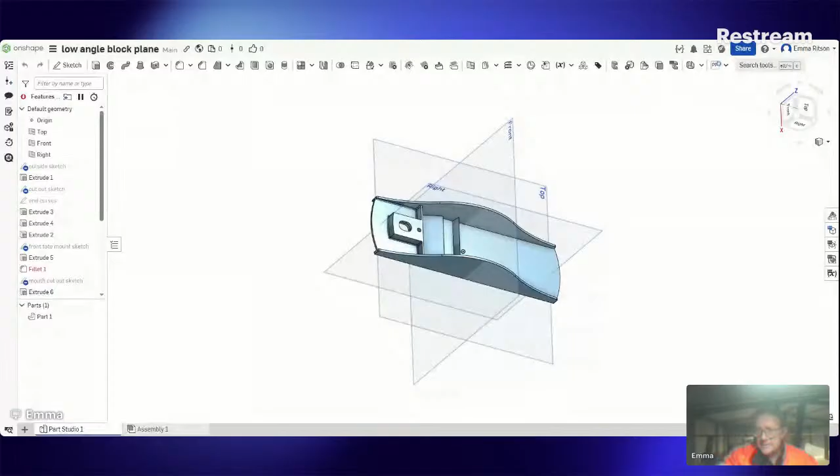Wonder what the weather's like in Brisbane. It's supposed to rain all week here until Friday. If it rains like this until Friday, we're going to have problems, and I'm probably not going to be working Friday, to be honest. But we'll see how we go with that. If we get 5-10 mil a day, it's going to be quite pleasant by Friday. So we'll see how we go. But we've had more than that today, and it's sort of been like this most of the day. It's just bucketing out there. Anyway, more than I expected. We're expecting a little bit of rain this week. It's cooled things down, but it's probably not our ultimate outcome if it keeps going. As soon as we get everything or nothing.

And the trouble with Glen Ray is that give it two or three days of this and the roads tend to disappear underwater. The yard here's gravel and not too boggy, so we're doing all right there, I can get in and out. Got to find somewhere flat and a little bit elevated to actually park the van to sleep. That's the thing, because if it's not flat, I end up with cramp all down one side by about 3 o'clock. Anyway, too much information.

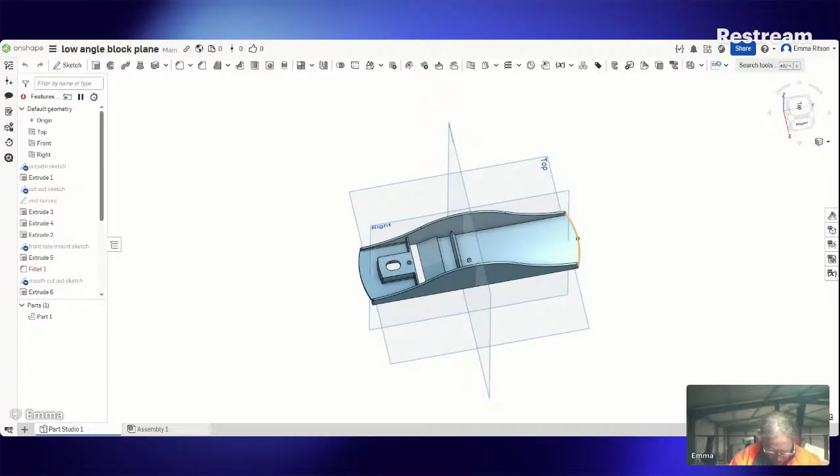I reckon that comes back from the back edge of that frog there, about 19 millimeters, and we've already got that piece in there, which is sort of a feature of it.

The easiest way to do that is just to make a plane from this surface. We use this button up here, which is the plane button. If you hover over it, it tells you what it does.

It says it gives you a plane from existing geometry. If we click that, it says plane, and the entities are here. So it puts a plane on that angle, which gives us something to work on.

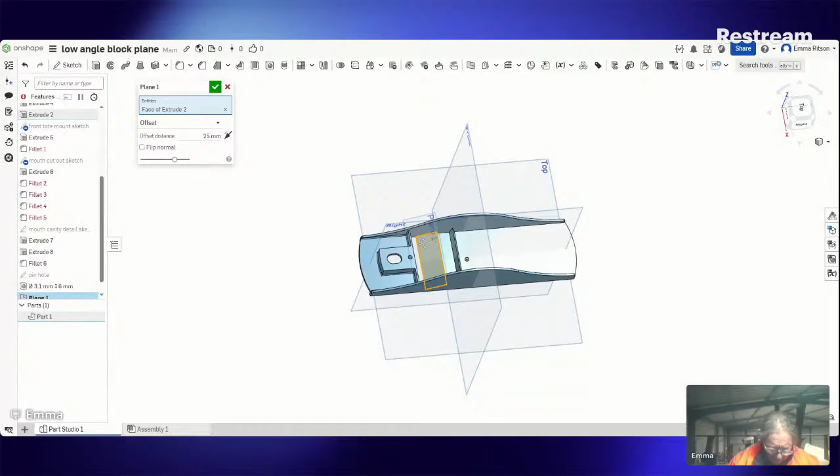Now there's a couple of things off that, so we're going to leave it and just change our pieces. I think we're going to leave that plane right on that level, so we're not going to offset it. This is trying to offset it.

There's all sorts of features we can do here with planes, but we're going to stick to offset, and we're going to go 0 millimeters. Probably simple as that, click 0. That gives us a plane the same as this one and this one, right there on that, 21 degrees for the low angle.

So if we want to put something on here off there, we can make a sketch directly on the plane. Sketch plane is plane 1. And if we press N, that brings it round sort of normal, so that this plane here is actually level and flat.

We use the use button and the construction line button. Then we can use this line here as part of our sketch. And that'll be a construction line across there as we've put on this sketch.

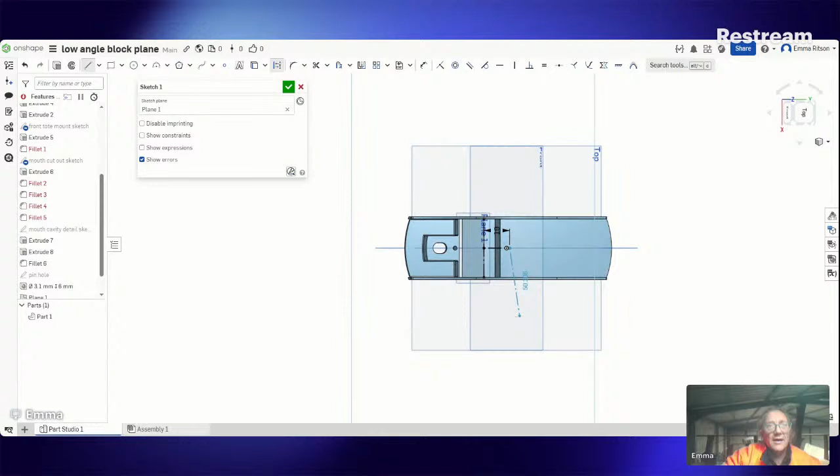Not terrible, that's about where we are. We'll zoom that in a bit so you can see. But that's where that is. It's way past where this is. This is not anywhere near far enough back.

This boss in here is probably about 12 millimeters diameter. So if we draw a circle on here on that plane, that should give us a circle on that plane. We'll go 12 mil, and we'll extrude that.

And of course it's extruded it up that way, and we want it to go the other way, so we'll change this direction. What you'll find now is the chopstick sticks out the bottom like that. That's not particularly helpful, put a bit of a taper on it.

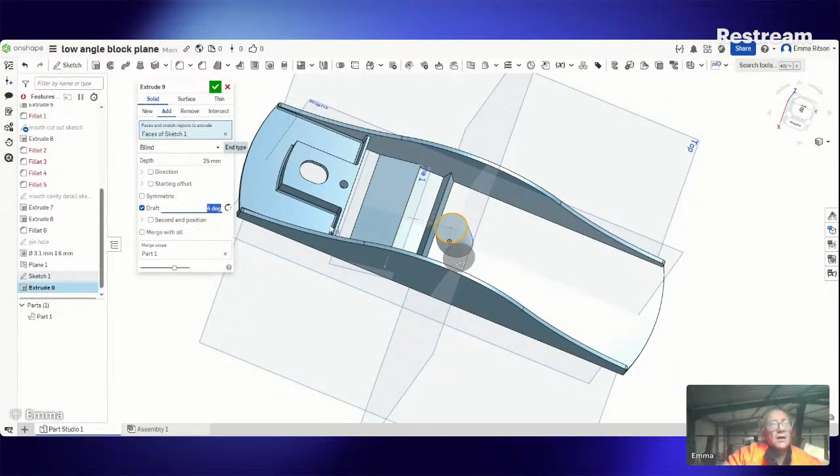So we'll go draft. There we go, I reckon it's 3 degrees isn't far out. Go 4. There, like that. Now it still sticks out the bottom here.

It's not helpful, but we can do two things. We can go past and make another sketch on the side and draw a box and chop it off, which is a bit ugly and cumbersome. What we can do here is click this up to face, and click on here, and we can select this face.

Okay, that's that boss in place nicely. So that's the way to do that.

This feature here needs to come back up a bit, I think. Probably 6 mil, something like that.

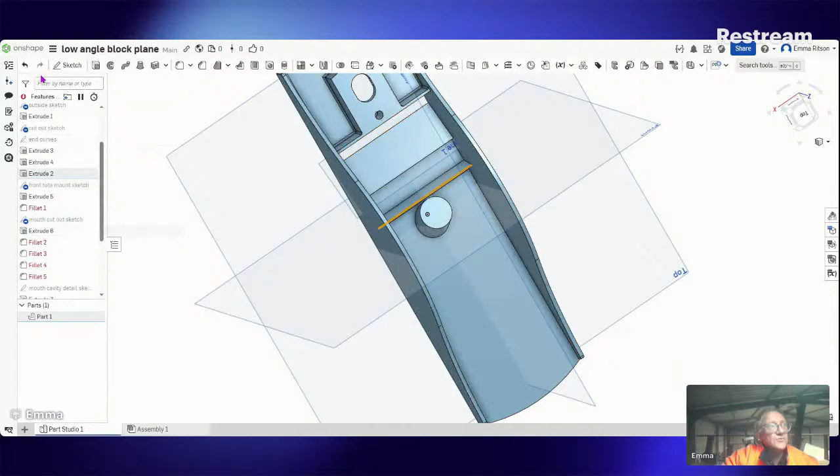So we've got to find this feature. If we click on that, it highlights the actual feature here in the feature list that we've actually used to make that, and it's an extrusion. So it's probably on the cutout sketch, I think.

We edit the sketch and click it normal. It turns it upside down, but there we go.

And this distance is not enough, I don't think. So we're going to change this.

Now put a line up here. Well, we're probably going to extend that line, I think might be the best way to do that. Is just extend that, and we can make that a construction line, and we can extend this one up here as far as we'd like.

Does that work? I think it did that time. All right.

So this distance here from here to here, if we measure it, just measurement here, on that plane is about, let's say 12 millimeters roughly. 12, let's go 18. If we change that though, it's going to give us all sorts of problems.

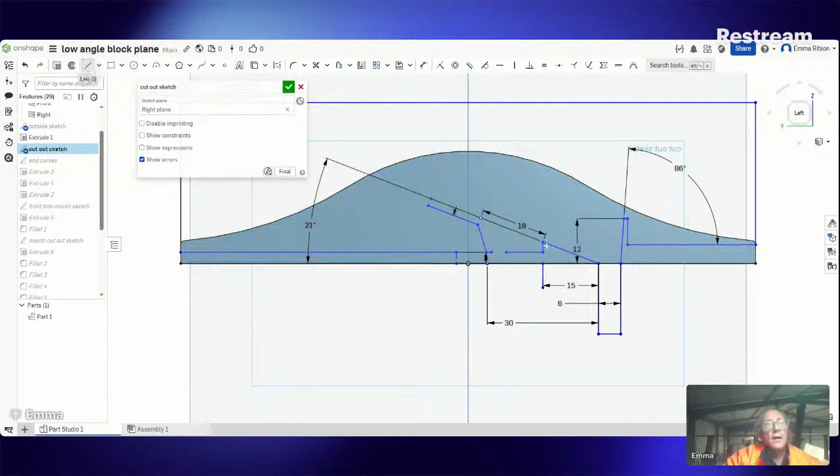We could put something up here. If we zoom that in, it's just a mouse scroll. Something like that. Click left, that back into frame.

And we're going to trim some piece out of here. So we'll trim that one out, and we'll trim that one out. And we'll extend the other one. We'll extend this one through to here. And that turns the background grey.

That means that we can extrude that. And if we click that - don't see anything's happened there. But look at that, somewhere pretty close.

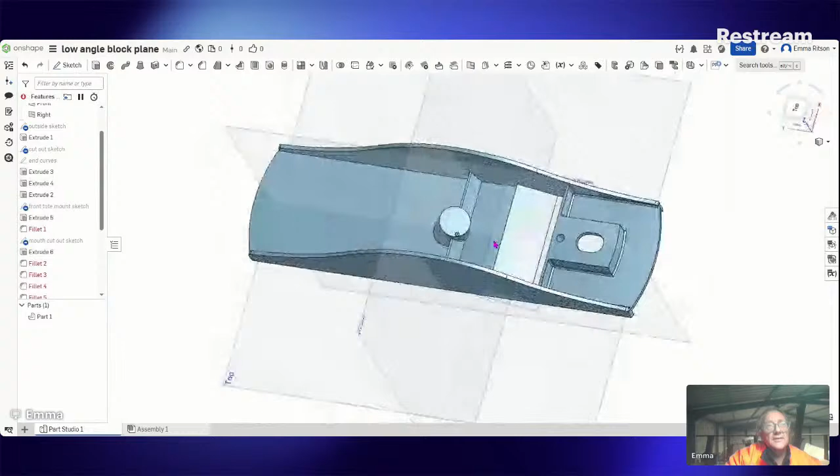So we've got that feature. We can go through this now and put fillets all around. What did we have the fillet set for before? It was 3 millimeters - that seems a bit extreme. Let's go with 1.

I'll fillet this on the side there. I don't think we can do that - no, it's not going to let us do that. So we'll just do one side. Hit the green button or hit the enter key. And the same on this side.

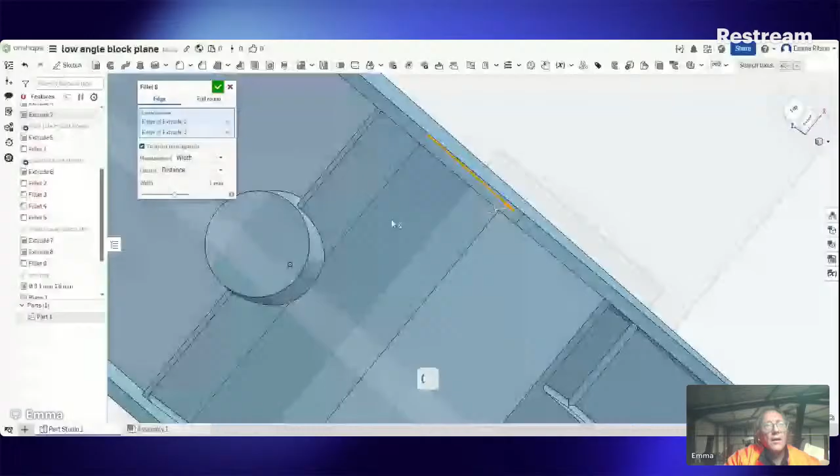Now this already has it set the same as we're using. We'll set this one. So let's put some fillets in there like that. Nice. And we want to do the front and the back, so we'll do that. This one is there, and then this piece, and this piece.

Confirm that, and we'll do the front. It's that line there. So that's all that in there, pretty good.

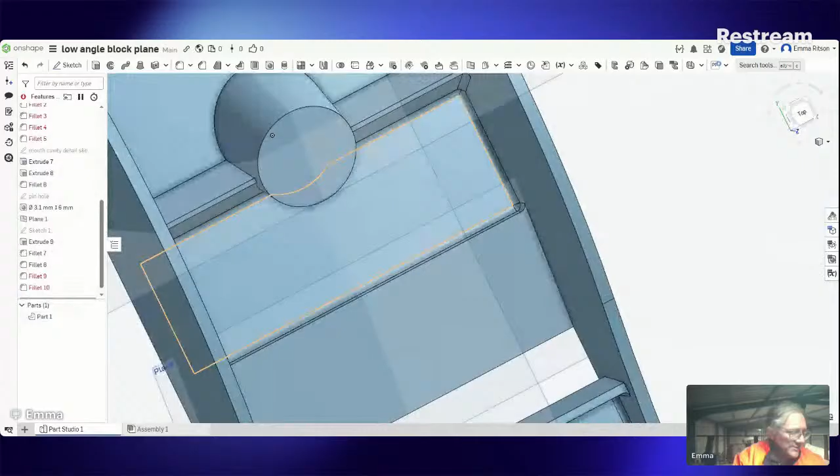We're getting a clicking noise. Can you hear that? Is that annoying everyone? Why are we getting that? Unplug this. It's annoying me. It's just started happening - I'm not sure why that is.

Hole in here, it's a M7 thread, I would say. I'm going to call it 7 millimeters because we'll go metric. We'll just put another sketch for that, and then we can change it if we need to, quite simply. We will rename that for...

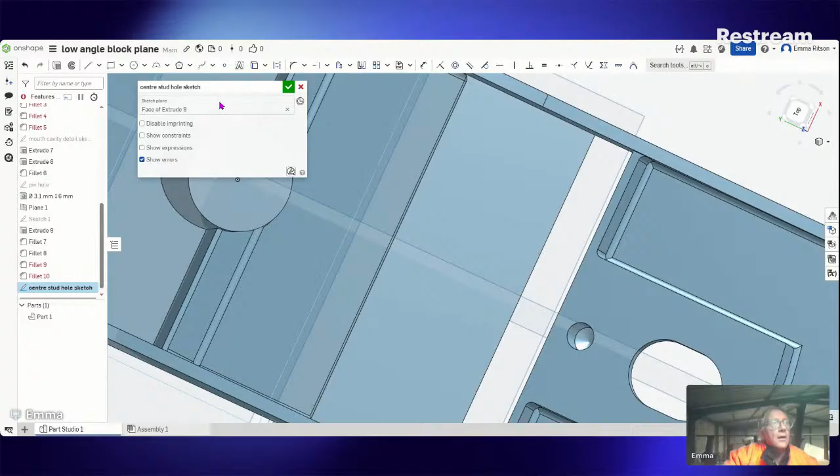So we can find it. On this face, I think we were going to put it. It's even easier if we forget where we put it, we can just click on there. There we go - face of extrude 8 and a 7mm hole.

7. That looks about right.

How far does that thread go down? Just far enough that it doesn't come through the bottom, I think. It's quite deep, probably 10mm deep. We'll change this anyway to 10mm.

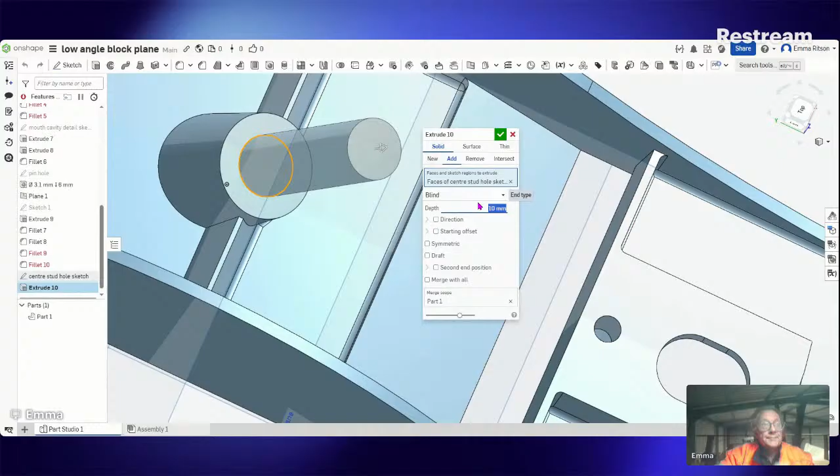And because this is an extrusion, it's pushing it out the front. If we click remove instead, it pulls it in there like that. Doesn't come right through. If we look on the side, that's about the space we've got. If we have a look here.

And hit enter again - we've got that hole. Now we can put a thread in there. There's a couple of ways we could do that. We use the hole function, and that sort of gives you a thread - it gives you an impression of it. It's a little bit ugly.

If we have a look up here, there's a feature script called Thread Creator. I don't think it's part of it - I think you've got to search for it. But with Thread Creator, we'll put a thread in that face. ISO standard, if you like.

M7 pitch is 1mm. What's the standard M7 pitch? Let's have a look here.

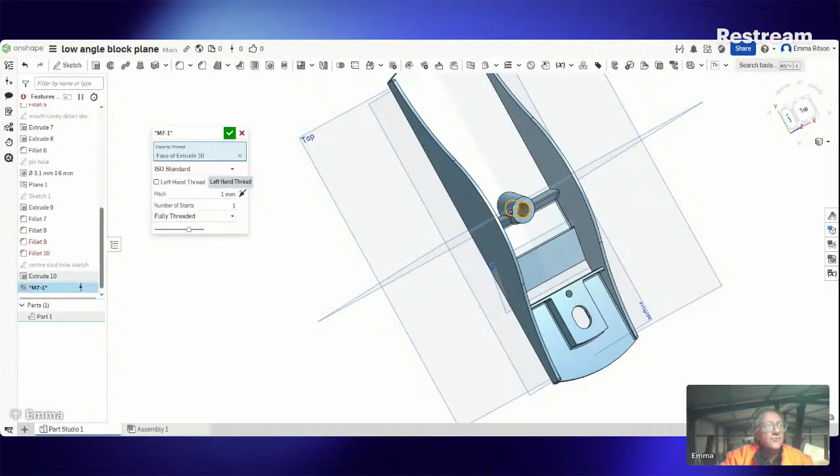So 1mm pitch, one start, and we want it fully threaded. We don't want a left-hand thread, we want it the ISO standard. If we click that, it's put quite a decent thread in there that we can actually add that sort of stuff.

So there we go, fillet around it, and we're just going to do it again. Like so, looks good.

And this here wants a fillet as well. I don't know if we're going to manage to do that, but I think a fillet on here. Yep, it's going to do that. Let's manage that as well.

We could probably fillet this while we're on the job. That looks pretty good, and we could put a fillet here.

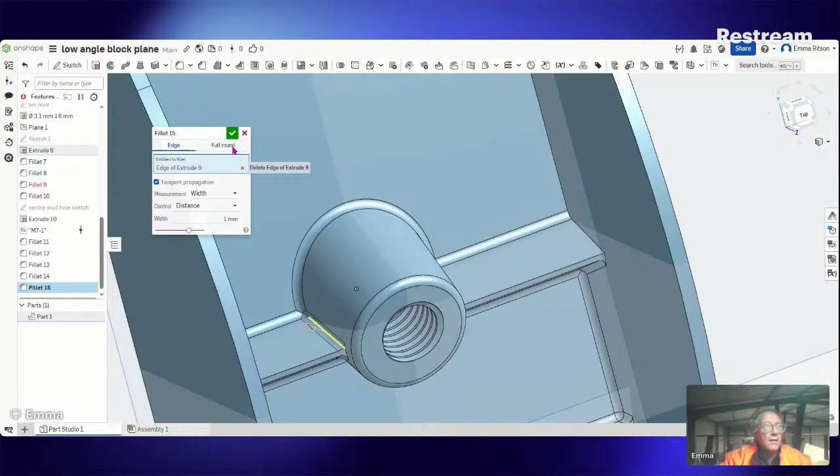Come on. This hasn't finalised as well as it should, that's a bit ugly. I'm going to try again.

No, it's not going to like that. It's done a beautiful job there. On this side, it's struggling.

It's details, but I'm not sure why it's done that. Anyway, we're going to live with that for a bit. It's done the side, it's given me a different fillet. Don't know why that is. Anyway, so that's that feature done.

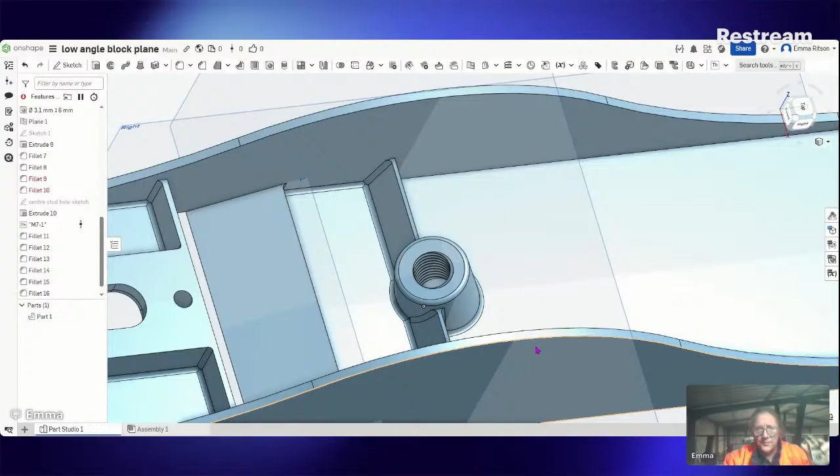Let's move on, there's two little cutouts, so we'll have a look at this again. So we've got this feature all finished here from last week, and we've got this feature here finished. I'm doing this in mirror, so right.

As a way of a change, we could put these thumb dents in here. They're about 17 mil by... oh my gosh, use my broken vernier, or actually fix it. Probably 37 by, well, it's bigger than you think. Probably 18 by 37. And might be only a millimetre deep. Let's have a look at that.

They go in the side here. Might put them in first or next. This line here is our plane. Now that's still showing - if we click P, all the planes. Press it again, they all come back on.

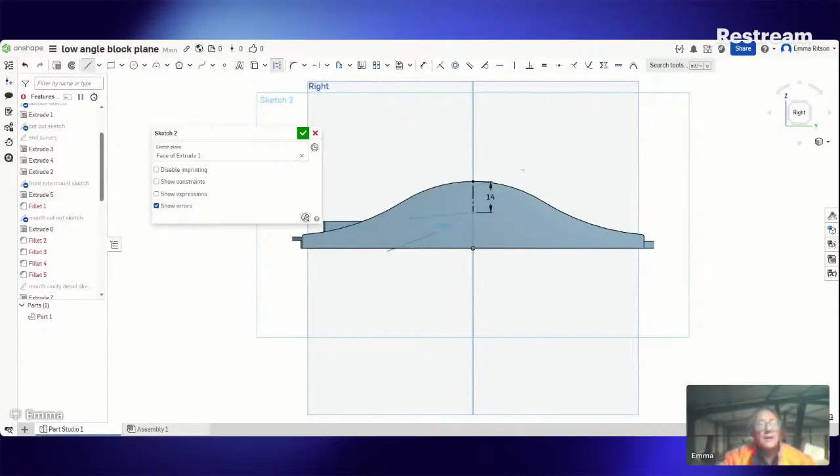Now if we click ellipse here on this menu - 37 that way, and 18 that way, something like that. So that's sort of how it should look.

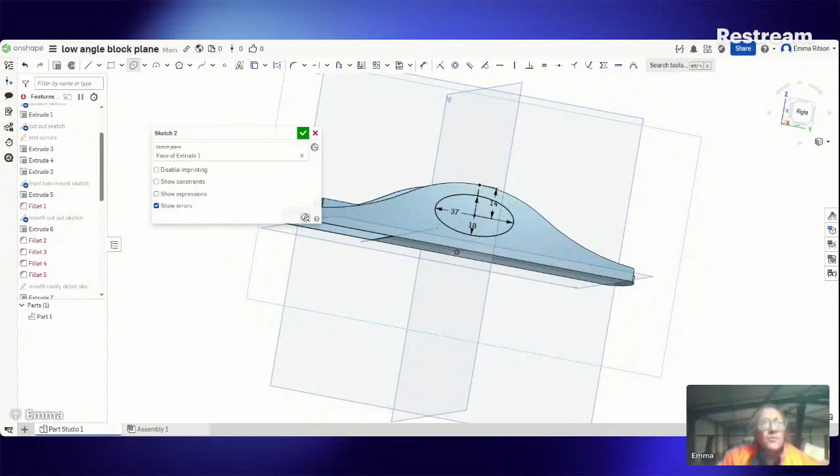But it doesn't fix your problem because it's not going to give us a concave face. If we extrude that, it's only going to give us basically a cutout with a square edge around here. It's going to look a bit ugly. So what we need is to actually make a ball, a squash ball here just off the side.

And we decided it wants to be about 1 millimetre deep. Holding a ruler over that or something, it's probably 1.2 deep.

And it needs to fill out to that line. If we go to the front here, and we hide part 1 by closing this little eye, we can see this sketch.

Make another sketch. Sketch plane, which should be the centre line for the ellipse. And a construction line here.

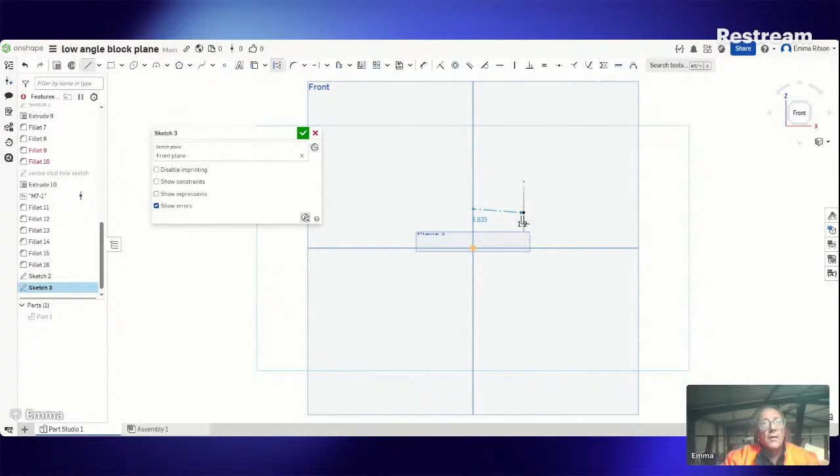I'm going to go this way, 1.2. And we need to find out here - if we go construction line from here, out here somewhere. Probably the best way to do that is use the use button or the project button.

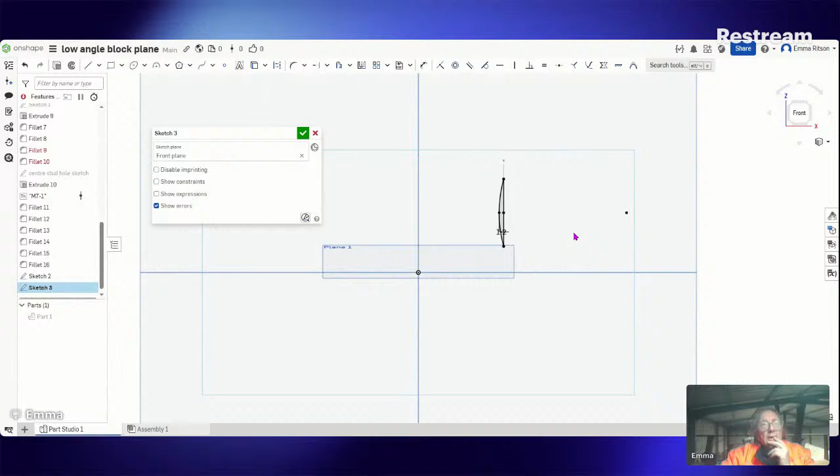And we put that line onto our new sketch. And we use this feature here called a 3-point arc. And our 34.35 millimetres. So there's our workout on that. We can put a measurement on that sketch.

What we're saying is if we draw a circle - this is a little bit challenging actually when you think about it. But if we draw here at 34.35 millimetres or 68.7. Hey, Peter. Right, that's sort of where we need to be.

It is a lot of stuffing in that. If we do the front here, we'll go to the top and make another sketch on the top plane, or make a sketch on that plane and face of sketch 2. And do the same thing, I think.

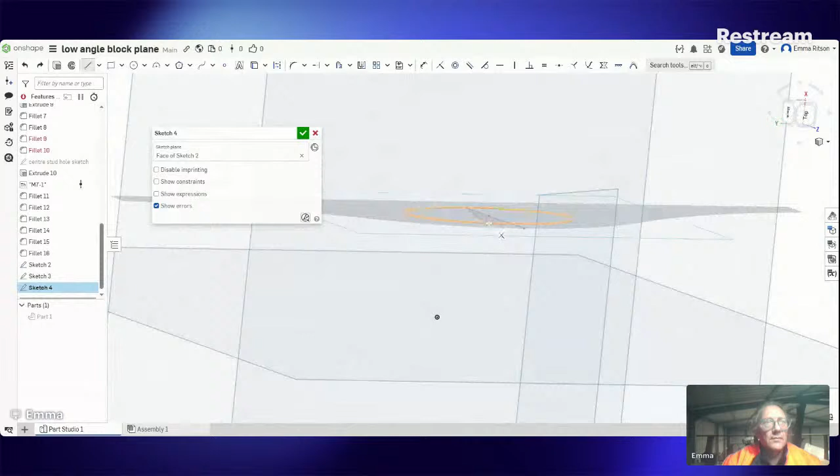Zoom it in so we actually line up. It's not going to line up, so we'll press escape out of that. Get rid of that, and what we're going to do is on this sketch plane, we'll draw a line. We'll click the use button, and we'll use that line there on our sketch plane. That way, when we do this, it wouldn't do it.

I see why too. All right, let's close that sketch 4. And it's got rid of that because there's no actual detail. What we need is a sketch on this plane here. So if we make a new plane, there we go. This is getting a bit complicated.

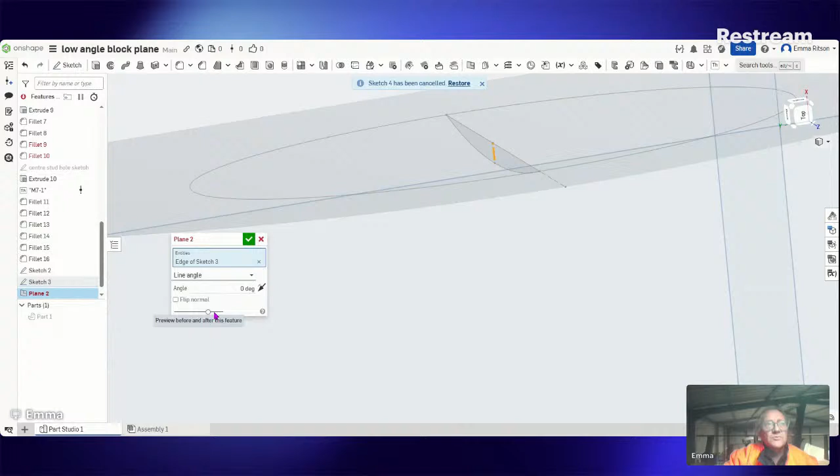Make a plane off that line. And it says offsets, not what we want, line angle is what we need. We'll make it 90 degrees to that line. Should swing around, and that gives us a plane there to put a sketch on. So that's what we need.

Sketch plane is plane 2. And then flip normal. Then we can use this line here in our plane, in our sketch, and this line here in our sketch, and the 3-point arc again. And that's 143.

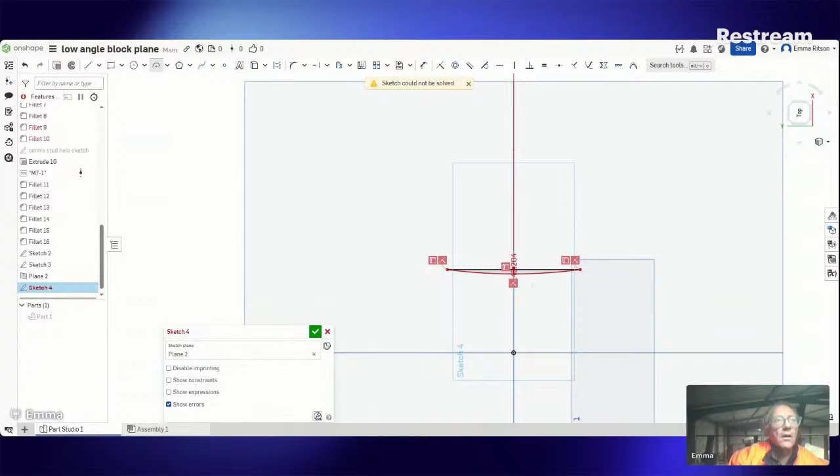So what we've got is the actual dish there both ways.

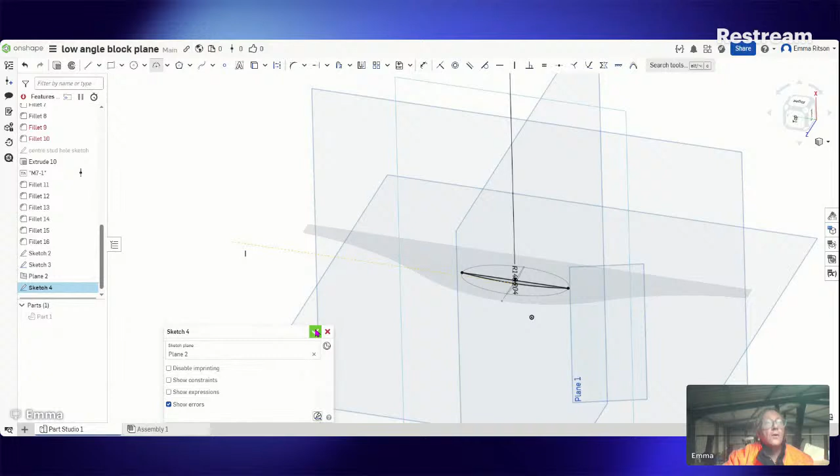So how do we convert that into an actual surface? Interesting. We've got this curve here and this curve here. We want to convert them into an actual surface. Now let's have a look at this. There is a way, I've just got to think about that.

Now, I think it's fill. Our edges are there.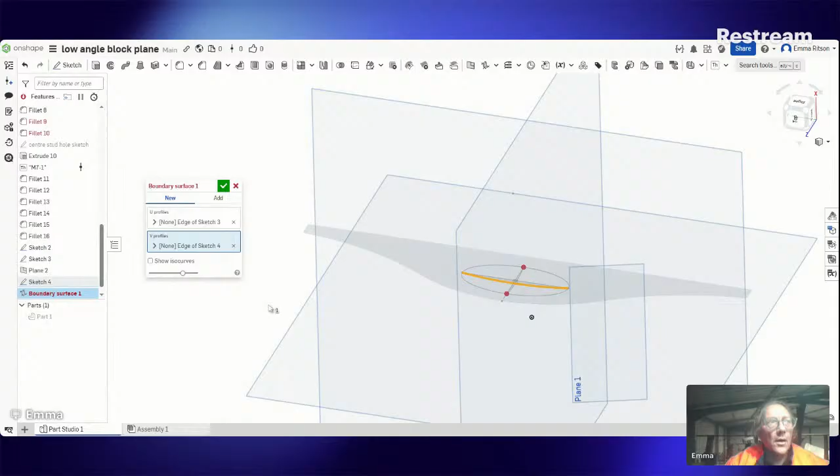That didn't work. So it's not fill. It's one of these. Boundary surface. Could be boundary surface. Not boundary surface. I'm out of my depth here.

I haven't done this for a little while. I think it's definitely fill, but we've got to find...

Let's fill the edge there. There we go, and there's this one. And this one. And that gives us a surface. There we go. It can be done.

It's given us that particular surface. It's not ball shaped, that's why. It's two different radiuses. But there we go, its function here now is thicken. That's what we're looking for.

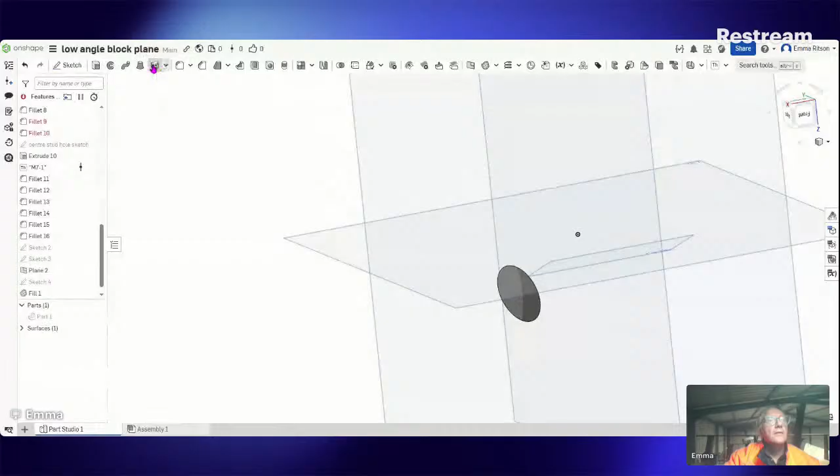Thicken. Thicken at 5 millimeters and make a new part, that piece. If we turn part 1 on, all we've got to do is remove that one from that one and we've done the job. Just nice. Before we do that...

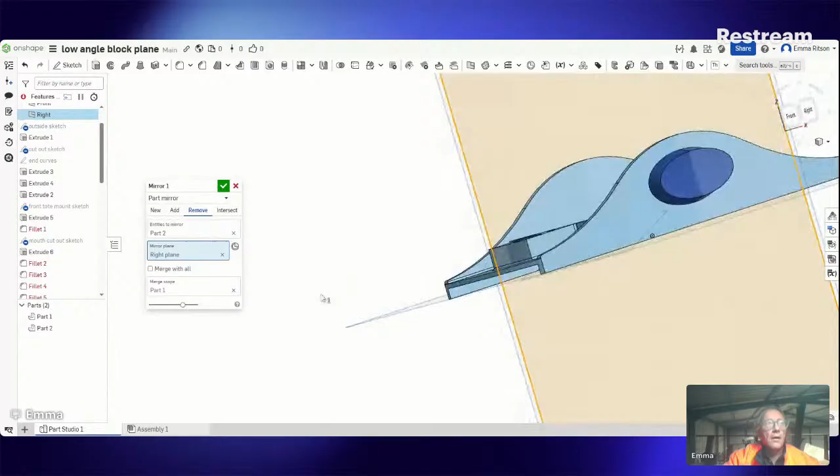We can mirror it. So if we use the mirror function, here we are, entities to mirror is this piece, and mirror plane is this one. It'll give us another one over there, and it's added it in. But if we go remove, that gives us a shape. There we go. Look at that.

Use a Boolean union for this one. And there's subtraction. We click subtract. Our tools is this one. And our target is this one. So there we go.

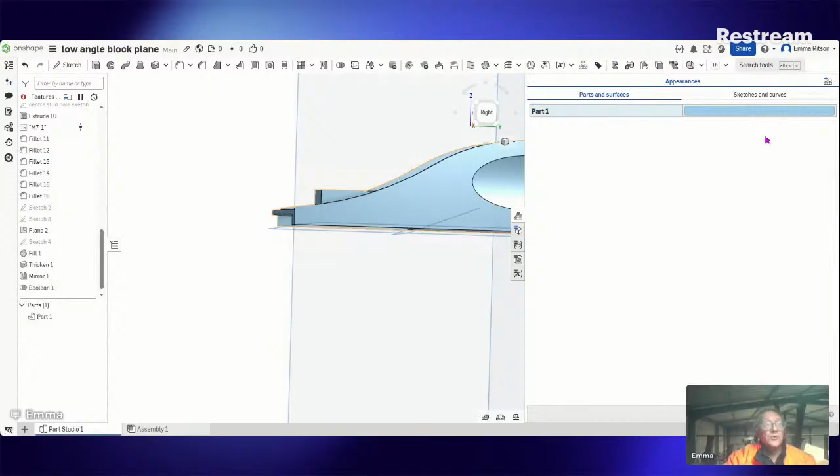To give us a bit of contrast, what we can do is use this appearance panel. Several ways we can do this. But our appearance of this part is blue at the moment. And we could go for cast iron, something like that, and change that to what we like. Click that one, close it.

Now, add appearance to face is this little one here. I'll put some black paint in there if we like. And black's probably a bit much. We'll go dark grey like that. We could do the same with this one.

Add appearance to face. And we go dark grey. So that should give us a reflection and all those sort of things on there.

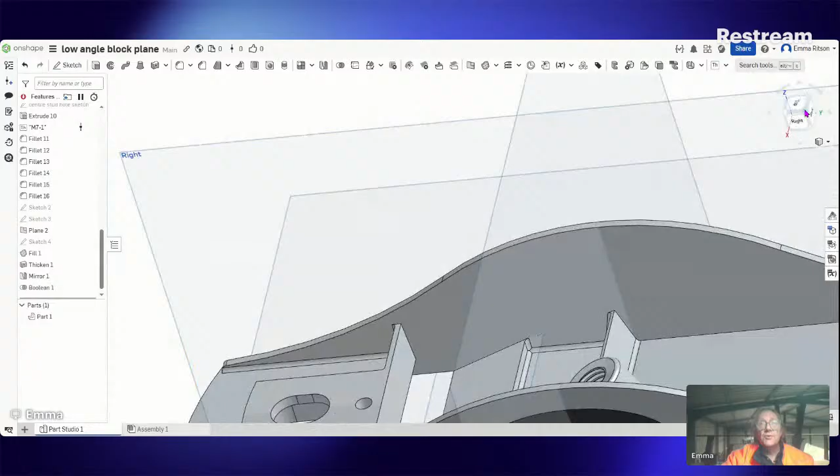Excellent. So it's a bit of an offside, it took some doing, but that can be done accurately and properly with very minimum sort of work. Once we've mapped it out, we can actually make that part. The thumb holes are in there, so we'll do another feature on this.

I'm enjoying this cup of tea, guys. New work cup. Yes. Big coffee mug, but it keeps a cup of tea hot till lunchtime, so I'm sort of liking that. And it fits in my car cup holder, which is also a big thing.

Anyway, next feature on this, will we do another feature on here, or will we make separate other bits? Vote. Will we do another, or will we make one of the other parts first? Too late.

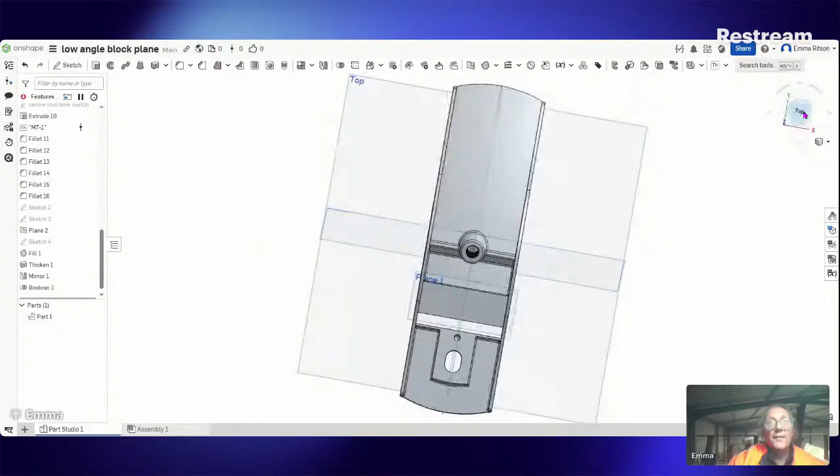I think I'm going to put this feature on the back, which is this boss right here in the back corner.

Looking at it, it's about a quarter inch back from this face here in the center, I reckon. We go to here. Over here, we'll trim that. Put a sketch on... actually.

Am I back? I think I'm back. I don't know what happened there, we lost a little bit.

Anyway, we're putting a new sketch right on the back, on the back top plane here. We'll go construction line - Q is the shortcut for construction line.

Put a line here. Hopefully not going to lose power tonight. I shouldn't lose internet.

Now, if we hover over this line, then we can trace this up, and it gives us a little orange triangle there, which gives us that point. We can come down here.

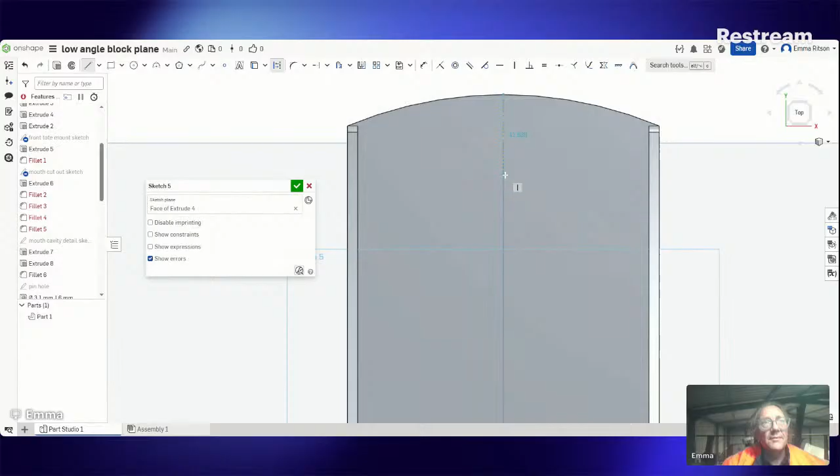And I said about 6 millimeters, 6.5. Let's go 6.5. And we'll press escape and collect just to close all those little features we've got open.

So that's right on top there. It sticks up about 5.5 millimeters. I'm converting this roughly to metric because it's all imperial sizes, and I'm sure they're just fractions.

But if we extrude that, and here we put 5.5.

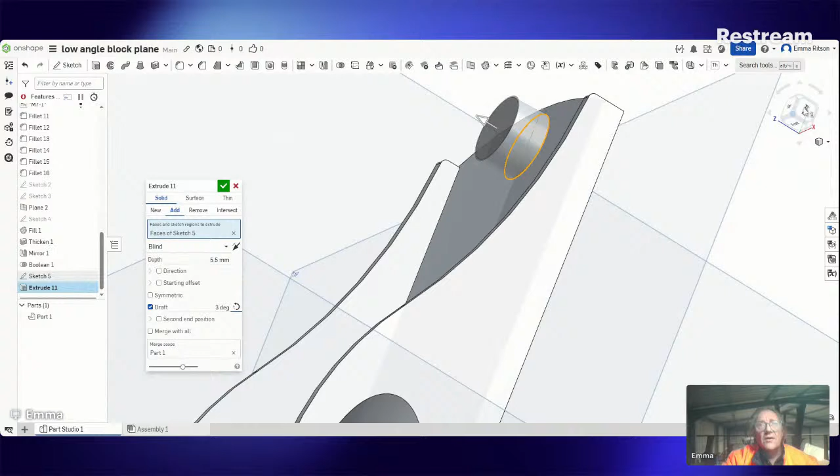And we'll put a bit of draft on it. Now this will automatically make the big end on that end, but we'll click this little arrow, it puts it the other way around, the right side so we can see it. What's that look like? And there's a little bit of draft. There's 3 degrees, let's go 5. Click OK or the enter button, and that's that.

We can go ahead and fillet that, like so. We give it a little bit more of a natural look. And fillet at the top, like so.

Same deal, this has got a thread in it. So if we sketch on top of here, we'll make the thread sketch a separate one. And we should be labeling all these sketches because it'll make it a lot easier on a complicated project like this when we go back.

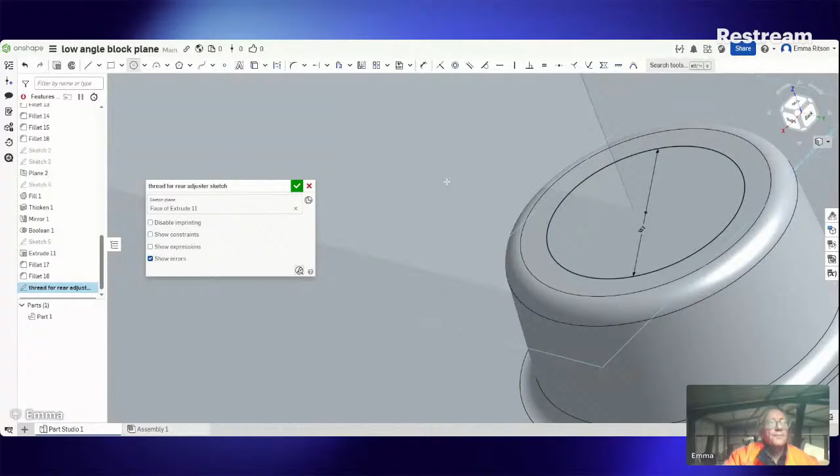And we can extrude that without even closing it. You can press enter if you like and finalize that. That's about what's 5.5, 6. Let's go 7 millimeters. And remove.

There we go, and the same deal, we'll put the thread, and if you've used this feature script before, in your feature script menu there, that'll be the one that's on top. There. It'll give you an imperial thread until you change this to ISO standard.

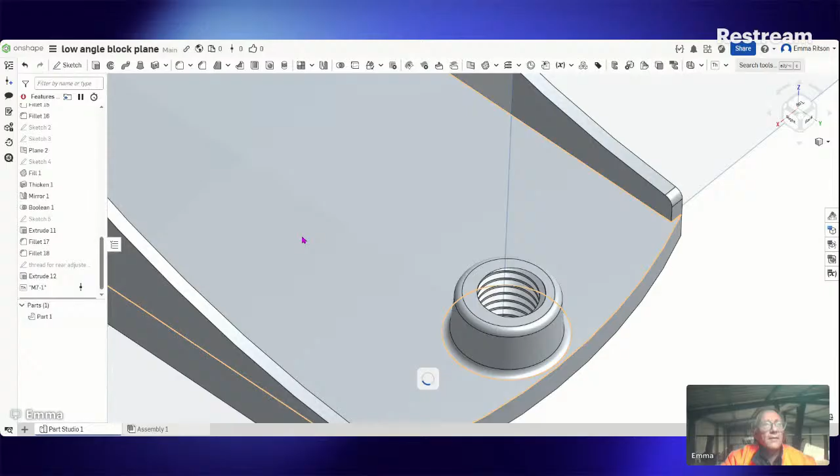And it's in 7x1. So that's that feature done. There's another piece in the center here, goes in here.

At some point, I think we should go ahead and make the stud and the nut for this. So what we're going to do is start a new part studio here. Create part studio. We're going to rename this to stud.

We'll call it rear adjuster stud. This is a pretty simple part, so it won't take a minute to draw this.

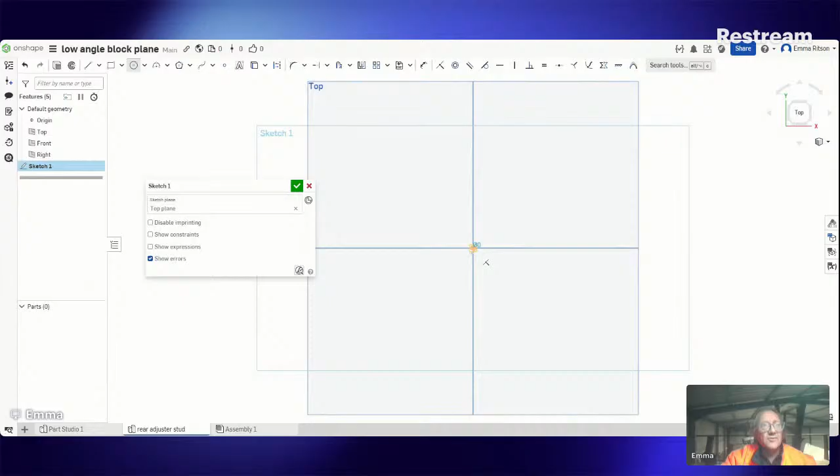If we go to the top like that, or we click this here, and it brings us to the top plane. We'll put a sketch on that plane, and we draw a circle there, 7mm diameter. Not a very big part. And we extrude that.

Now it's about 34mm long, so 34. If we right click and drag that around, it gives us some sort of idea what it's going to look like.

To fillet it on the top end, it's almost right round, so I'm going to make a 3mm fillet on it. See what 3.5mm looks like. There we go, that's better. We'll do that, and that's what that looks like.

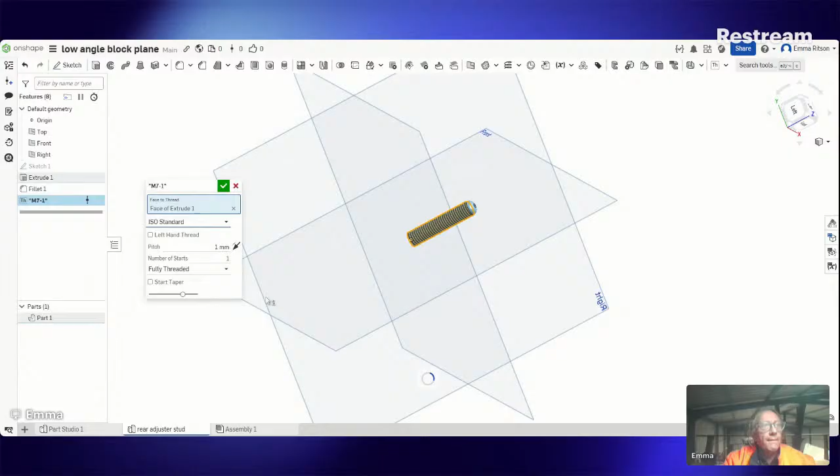Same deal, thread indicator, I click on the surface. And we don't want American Standard, we want ISO. Give it a second to wake up. M7x1. And there's that start.

We click down on here, not there. This part here, we'll try this part. And edit appearance. Let's select the different. I haven't assigned materials or anything for it yet, but that part's done, so that's simple.

So we've got this part and this part, and we can go ahead and make an assembly. Now, assembly is where all the parts come together, and it's a little bit different doing this, compared to other programs like Solid Edge, it works a little bit differently.

But we can insert each part into this drawing. If we insert that, it puts it right on the same place in the modeling space as it did in the original.

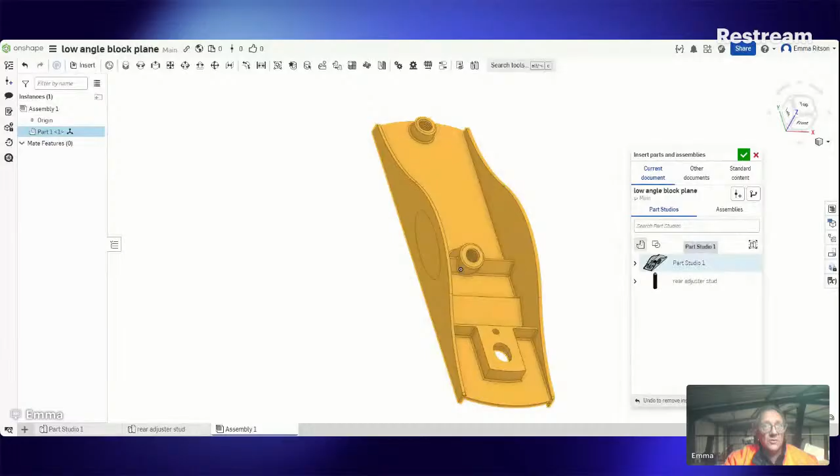So you can move it around, but if you stay on, we'll put the next piece in too. If we put this rear adjuster stud, which is our second part, in, that puts it straight on the origin point, the same as we drew it.

If we come off that little window, we can put this anywhere. We put that up there. That needs to align in that hole there.

There's a mate for that. But before we do that, this part here, we're going to leave as is. So we're going to fix this - right click and click fix. A little line comes beside that, and you can't move this around. It's fixed, which means you're not going to bump it.

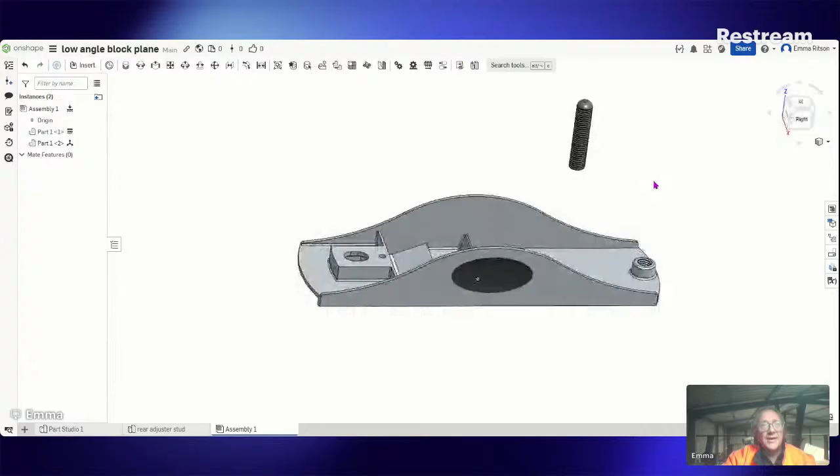You can still move this around. If you pick this up, you can move this anywhere. But if we use a mate, we're wondering which one's best - there's a helical mate, and there's a screw relation. That's probably the best thing.

Distance per revolution is 1 millimeter - that's the pitch. Our mate here is basically the top of that, and the bottom of that.

It's expecting a mate though. So before we do that, we'll put some mates on here. That's this little button here, a mate connection. We'll put one on there like that, right in the middle. We can put one on here like this, also right in the middle.

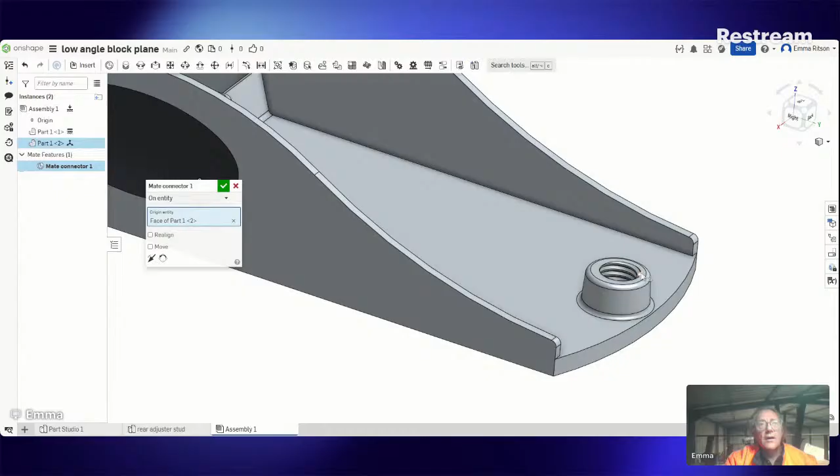And put them anywhere, but right in the middle of that one - there we go. We've got one. We'll put another mate connector - let's go right in the middle of the top here because we know that that's actually cylindrical. So we'll put a mate connector there.

So what we've described is that we've got two mate connectors - one here and one here. Now, if we've used this, which is our screw relation, and we select here, we select mate one.

Let's do that. I should just do that. I'm probably going to do this the easy way rather than the difficult way because this doesn't need to be screwing in and out and animated. Let's close that. We'll start again here - something we can always do is start again.

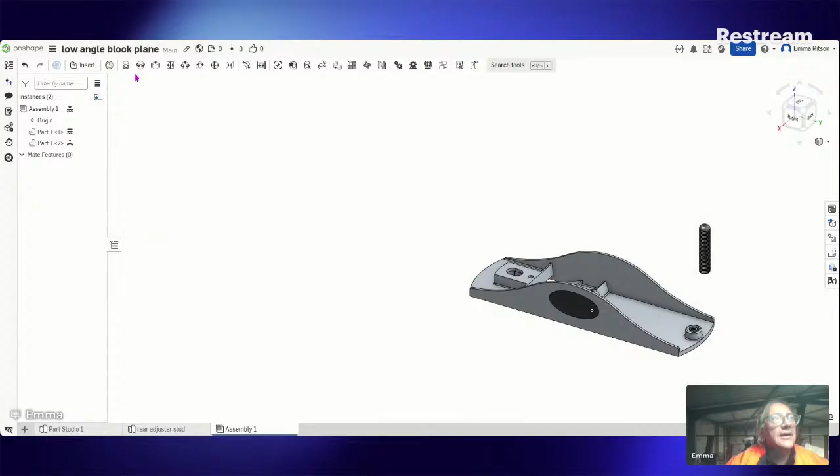I'm just going to make basically a revolute mate, and we can click that there. This will need to take a bit of messing around if it's the first time you've used it.

Because this is actually in the center, whereas the bottom of the thread won't be. Let's fit that in there like that. We want to offset it. The mount we've got sticking out, I think, is about - looking at this - probably 25 mil. Negative 25 is what we need.

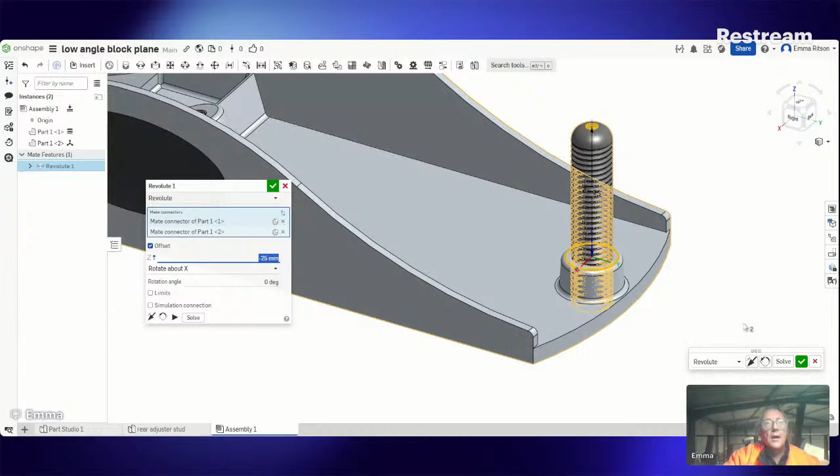There we go. What we have discovered is that stud's a little bit too long because it's sticking out the bottom here, and it shouldn't do that. We can go back and adjust that. Now the extrusion, if we edit that, we'll just edit it to 32.

We go back to our assembly. That should have automatically updated that - there we go. So that's enough. It might not be lined up, but we can move that around if we need to line it up, just manually. We should be able to set it as a screw mate, which slides in and out at the right pitch. But it's a bit more messing around, and unless you're going to animate it, there's probably not a lot of point in it.

Next part's this fancy nut. Have a look at this - it's a brass piece, which I like a bit. So this fancy nut here, it's got a rope knurl on it, which is a bit flash.

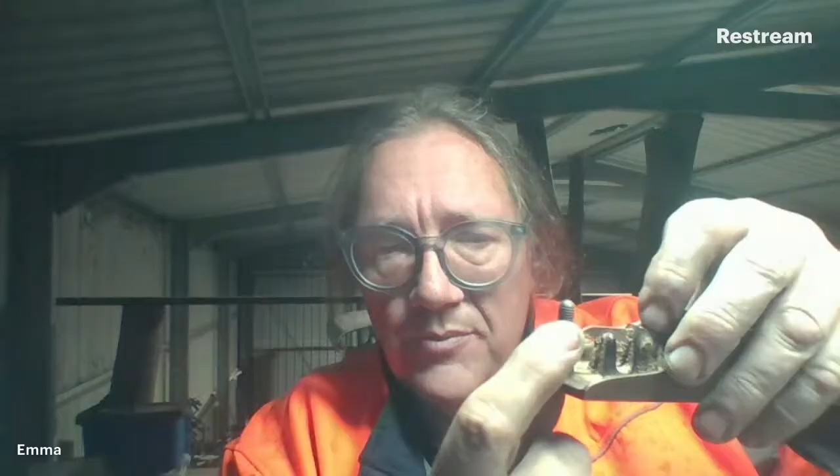But it's got a rope knurl and it's got a recess in the top and the bottom. Anyway, we'll have a look at that. What that does is move that little lever up and down and adjust the blade in and out.

And that goes on this stud here, and we should be able to animate that to go up and down without any problems at all. That should be an easy job. We'll make a new part - so new part studio.

We'll rename that, in keeping with the rest of it, to adjuster knob.

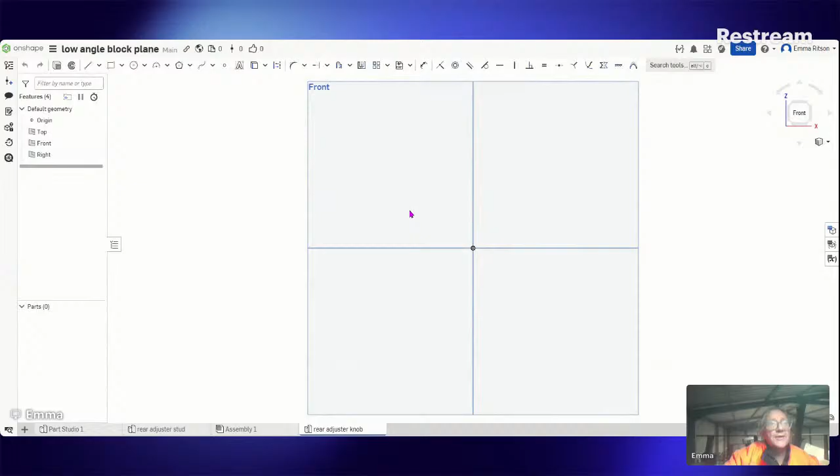So let's do this bit and put it on, and we might call that a night because we've sort of had a bit of a go. New sketch on here, and we're going to sketch the profile basically.

We want a line, and we're going to press Q for a construction line. We'll put a center line up here somewhere - it doesn't matter really where it is, we'll remember that. And the reason we put a center line is because we can then use diametral measurements on this, which is really a nice feature.

If we click the measurement here, and this one - right? That'll give us our outside diameter, or that gives us the full diameter, and we're only drawing half the profile to revolve it. So that's a really nice feature.

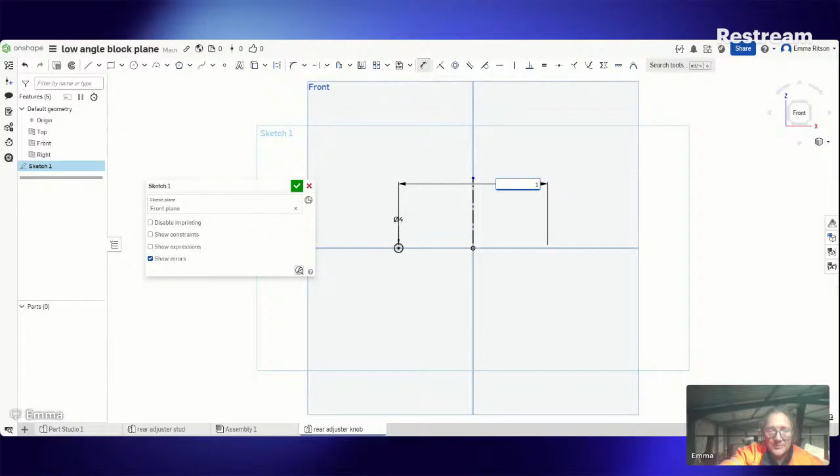Now, the center of them is about 19 millimeters, so it's nowhere near as big as we thought it was. There we go, we can zoom that out so we can actually see it. Come over here, it zooms that way. If you use the center roller on your mouse, it zooms that way.

I reckon this here, if we draw a line across here somewhere, this is a line, and a measurement on that, so that this is between there and there. I reckon that measurement needs to be about 1 millimeter.

We can trim that up, using the trim tool. It's very easy to get these mixed up. But if we click trim, and trim this piece out of here, and trim that off the end there, and trim this side of the construction line.

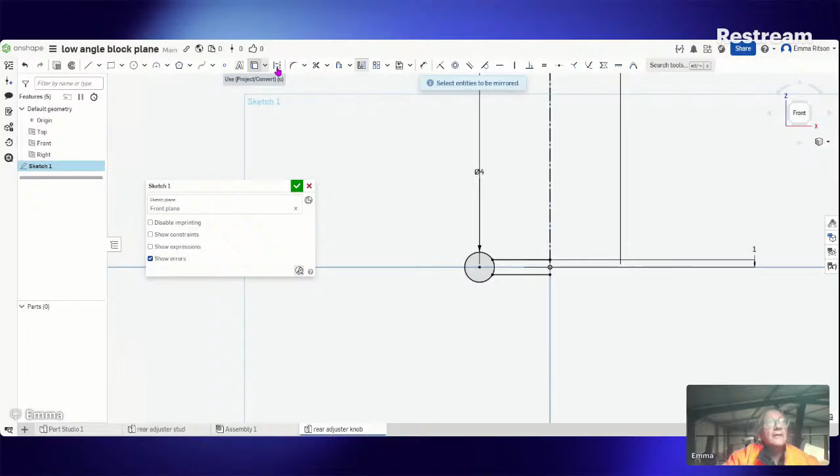And we can mirror that, so mirror that across the center. If we use the mirror line, and mirror that one. And if we trim this piece out of here, that gives us our profile.

Now, center bolt is about 9 millimeters diameter. So if we put a line here, something like this, and a measurement again, we click on that, and then we click on that line, that'll give us this measurement here, and we can put 9 millimeters diameter.

Now it's about flush on the bottom here. So we draw a construction line here, from here somewhere, across here.

And trim those two. Trim that one and that one. And that one. Oops. Control Z fixes that.

That's what we need to do. We didn't realise we need to extend this construction line down here somewhere. We can do that easy. Except we didn't do it. Oh, it's only extended it to there. That'll do, now we can trim it. Pressing M is probably the easier way, but I only got one handful.

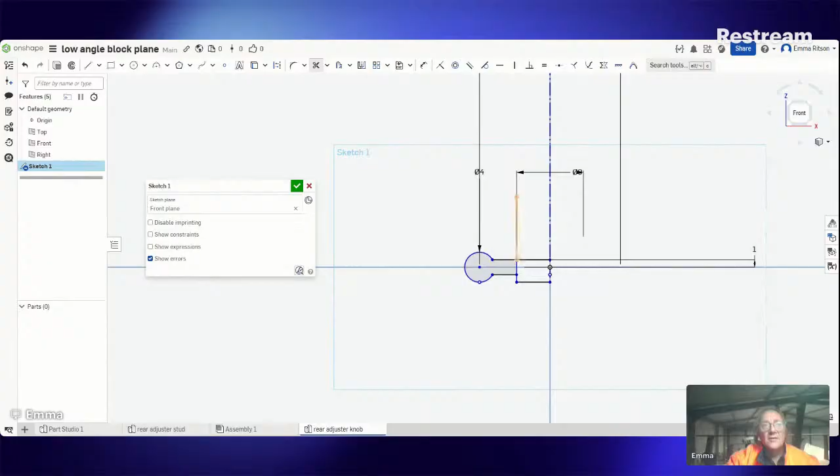It's starting to give us the profile. Now, I reckon that comes up 2.5 mil past there, so it's 1 mil. 3.5.

Same deal, if we draw a line across here somewhere, it doesn't need to actually meet anything up. We can put a measurement between this one and this one. 3.5. Does that look about right? Probably looks about right, trim them again.

While we're at it, we can put a fillet in here because I think it needs it. We don't need a 5mm fillet, we only need a 1mm fillet. And that does that. Still got this line in here, so we're going to have to trim that out before we put a fillet in.

There we go, now we can do it. Oops. And it remembers too what the original, what the last one was, so that's sorted that out. That's sort of what we got.

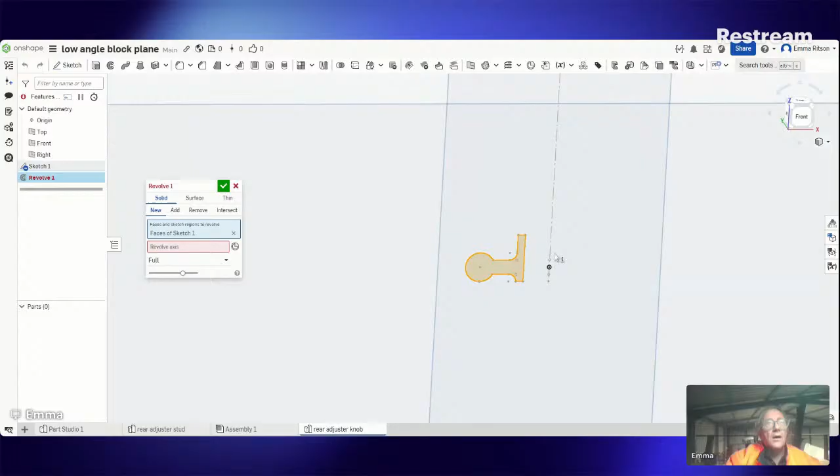So using this here, rather than this extrude, if we use the revolve tool, a revolve sketch, a face of sketch and a revolve axis here. That gives us our knob. There we go, without the fancy rope knurl yet.

But there, we can put a thread in it. Thread creator. And of course it defaults to American, don't know why it does that. We don't want a square thread, we want ISO standard.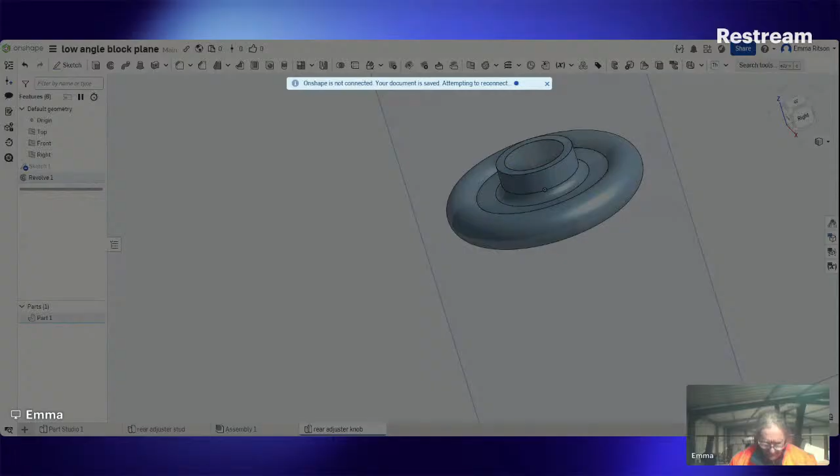I think I'm back. Because we've lost connection there again, it's tried to put a thread in there. We can go and change the version sort of stuff, but we won't. Let's try again, we'll put a new thread in there.

It's that face we want to thread. 1mm pitch.

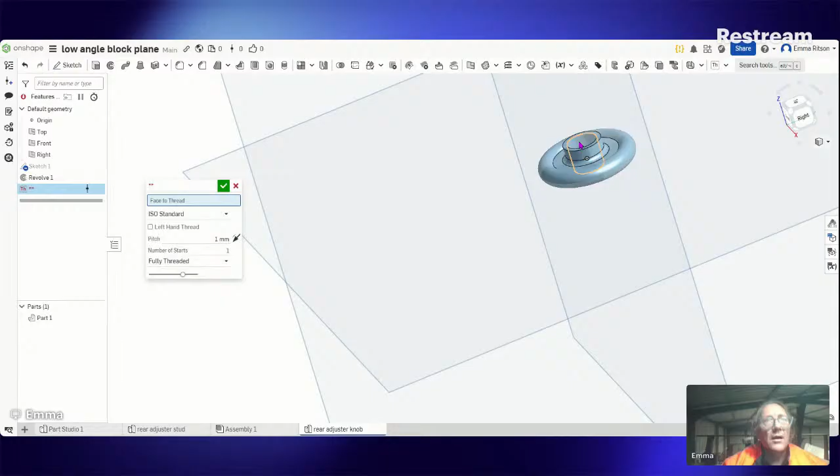M7 by 1. Click that. So there we go. That's roughly what it looks like.

It needs a rope knurl around it. That's a bit more stuffing around, but it's certainly doable. It's very doable.

But let's click this and edit the appearance, making this, since it's brass. So we'll make it a nice bright yellow, or probably a bronzy colour. That's probably a fairly brassy colour, is it? Something like that.

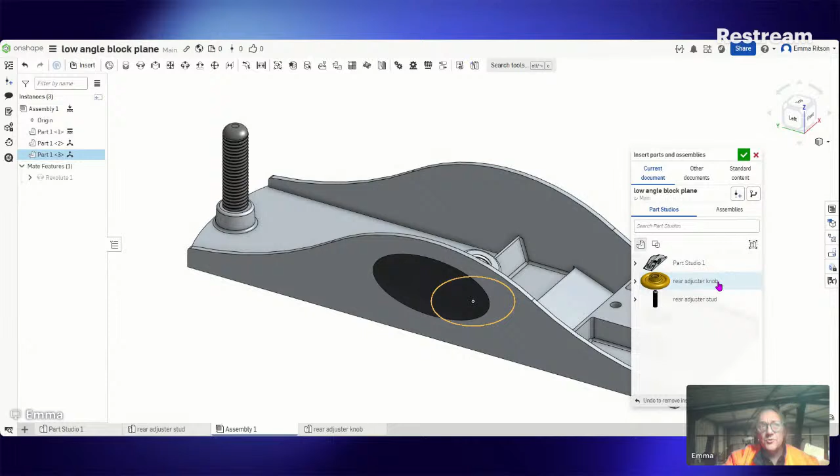And come into our assembly. So this is what we've got. Insert into our assembly the rear adjuster knob. Now let's put that right on the origin point. We don't want that because it'll be hard to find. So we'll put that up there.

Zoom this right in so we can actually see it. I'll put that there. And hopefully, if we do this, we should play the game.

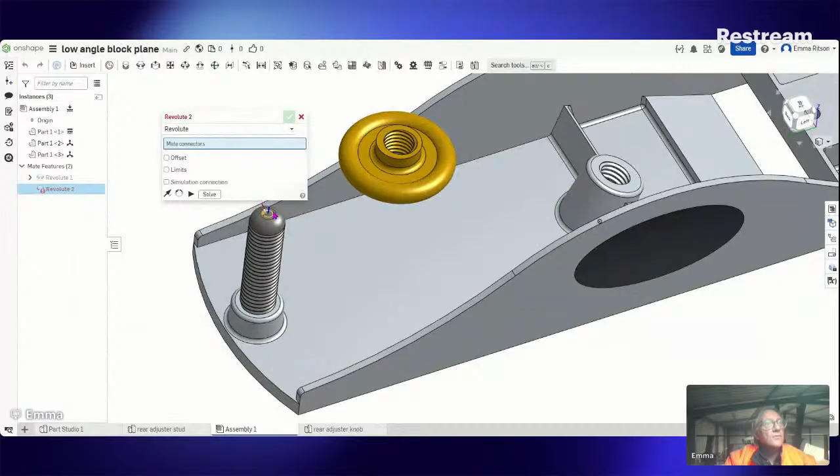This is not a function you use very often, but if we delete those and make a revolute mate, cylindrical ball revolute. So what it means is that we need to mate these together like this. So if we click that on there, and there, that puts that in place. Sort of. Then we can do this.

Oh, we're looking for, that's not a revolute, it says cylindrical. Why are we doing this? We just got to read the instructions.

Move that over there. A cylindrical works both, whereas revolute just turns. So if we click that there, that's one, and there is the second one. We've got a cylindrical mate. That's what we need. Then we can do that.

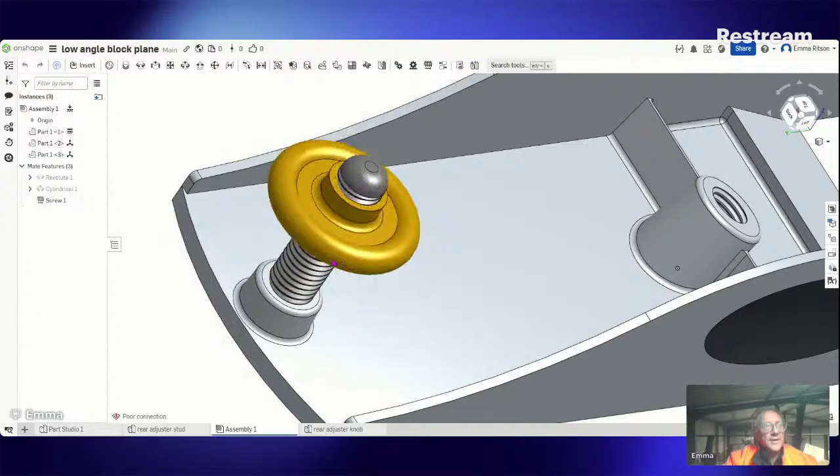And it's done it. So there we go. You can't see it turning, but we can pull it, drag it back and down. So that works.

Distance per revolution is 1 millimeter. Just change that. And now if we drag it around, it goes up and down the screw.

John's up late. So that's that working. Anyway, we're getting there. If we put a knurl on that, we'll be able to see that turning. But take my word for it, it is.

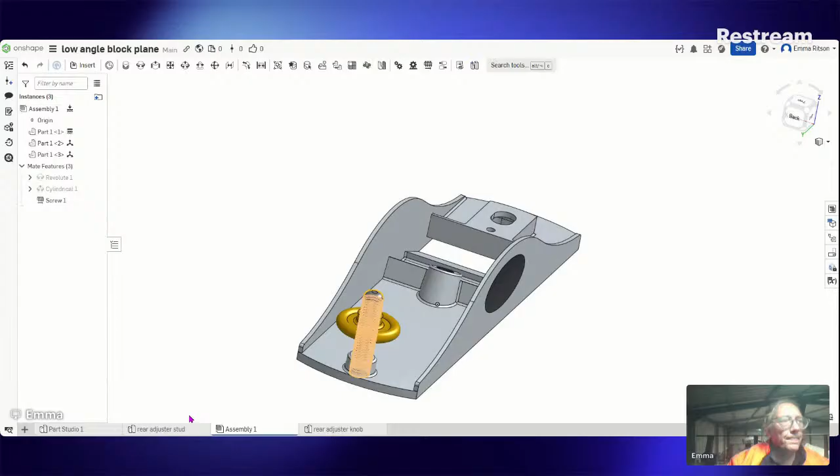Let's knurl it. Now, we just put a flat knurl on it, but this has got a fancy rope knurl, which goes around the surface here, around the cylindrical part of it. And rather than being full round, it's got sort of a flat piece on the outside.

So back here to sketch one, we can easily pull up. And that's all on a funny angle. So if we click N for normal, brings it round nice.

Now, what we're going to do is draw a line here, something like this, because I think this is the feature it needs, between there and there. And the line, if we hover over that and then drag out to here, it'll tell us it'll join on in the right spot there. And we can go across to this line, which is red.

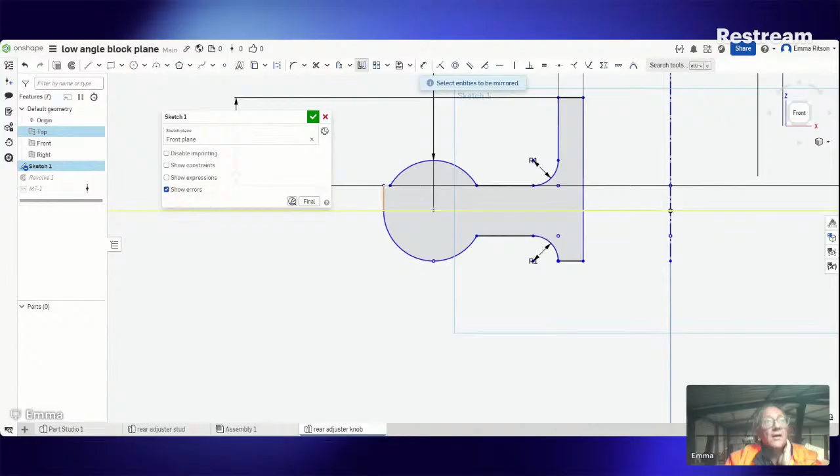And we can trim this out. Trim that out. And probably the easiest way is just to mirror that. And trim that piece out.

So that gives us a flat surface, and I think we're just going to put like a... there we go. That looks more like the shape.

Now, the knurl looks to be, what, 30 degrees? Something like that. It wants to be a V groove about 30 degrees and a radius round there.

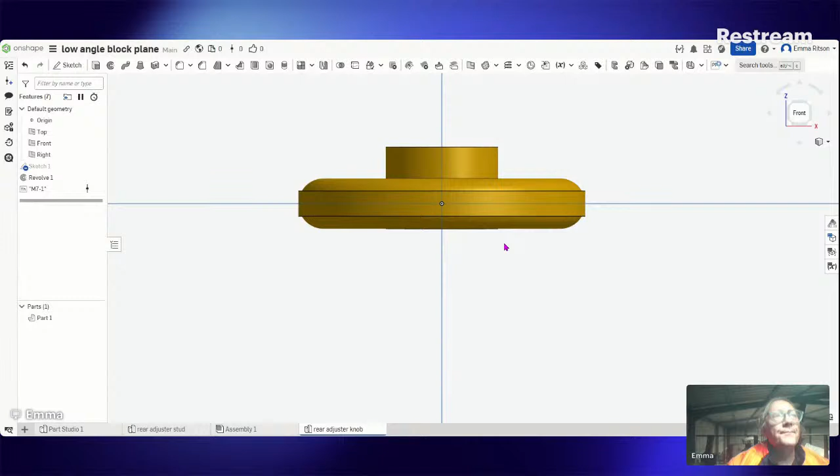So what we probably want to do... you're thinking about that? How do we do that? A straight one's very easy.

Are we going to cheat and put a straight knurl on it? Probably. We'll go to the top view and we'll put a sketch on here. Which is terrible.

So what we want, triangle that looks something like this. And we just use the same dimension, but if we select this line and this line, we'll probably do that and mirror that.

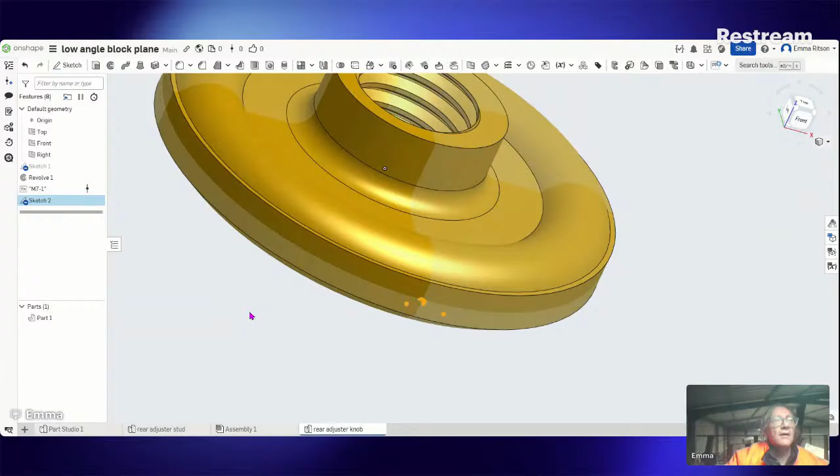A new part. Fix symmetrical and it goes each side of the centre line. No matter how far that sticks out there, but it doesn't need to be that long. Let's call it 5, it'll be a little bit clearer.

We've got a new part there that we're eventually going to take away from the knob and put a knurl in there, and that can be adjusted so it looks right. From there, we're going to do the same thing, not with that one though. This one here, a circular pattern.

And that gives us an object pattern rather than a sketch pattern. We're going to pattern that one. Our axis of our pattern is going to be on that line, or that line, doesn't matter. Right? And we want, what, 100? How's that look?

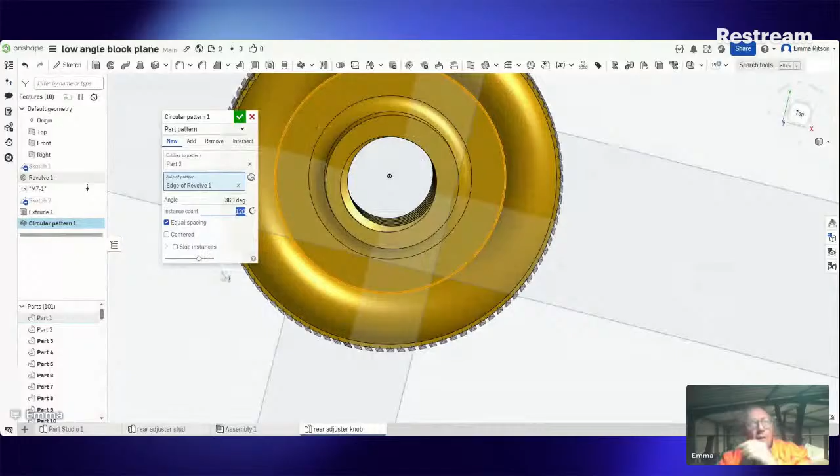120. That might do. And we're going to remove them from the merge scope is part 1.

There we go. That doesn't look too bad. It's quite pleasing and straight. It would look much nicer with a knurl. There's no knurl button, there's no rope knurl on this button. There should be. If someone wants to write a feature script, I'm sure that it would eventually become part of the program, and you can go online and do that and make it work. But it's not my thing.

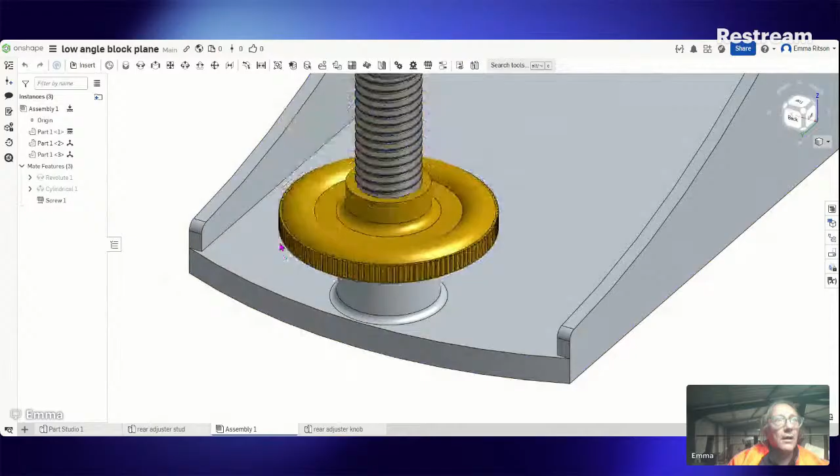Anyway, if we look back at our assembly, that should be automatically updated. There we go. It's starting to look something like. If we turn that, you can see it scrolls up and down, winds up and down, so that'll work. Very cool.

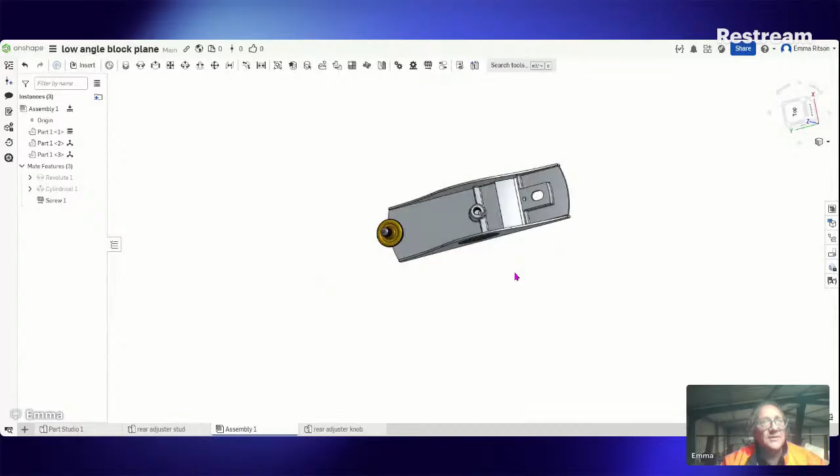We've made these cutouts in the side, and we've adjusted this to look the same as the actual plane with copying. That's all it is, a copy of a Stanley 100. That's not a bad effort. It's getting on a bit. So, that's interesting.

Next parts, I guess, are the rest of - let's have a look at this. Next parts, I guess, are this feature in the center here, this little piece here, and this rocking bracket that works with this, so that we animate it so that when you wind this up and down, we can put limits on that adjustment. That's easy.

So it only winds from there to there. When you wind that up and down, this little bracket moves backwards and forwards on this pivot point here and moves these two little knobs backwards and forwards.